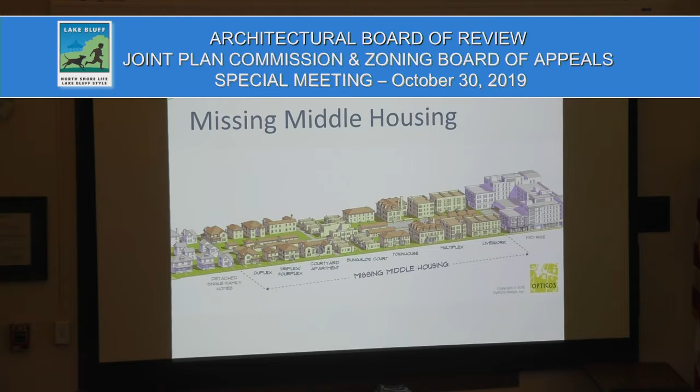They're actually called missing because typically they've been illegal to build this type of housing product. If you look at it, it's all that housing between mid-rise buildings and detached single-family homes. Since really post-war, that type of housing product has been outlawed by most zoning codes: the 2-flat, the 4-flat, bungalow courts, townhomes, not what you see built today.

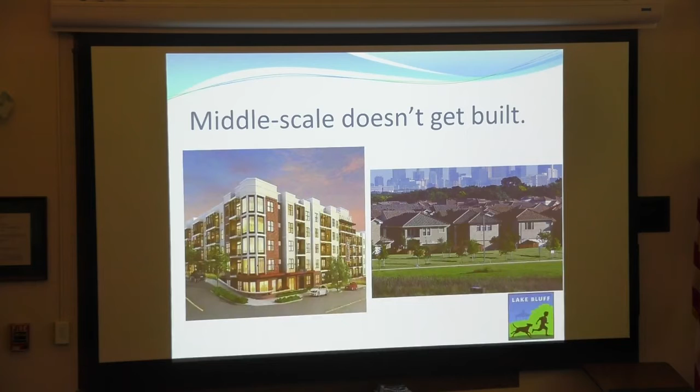I think of it like groceries - there's bulk economics, and then there's luxury groceries. It's the same with this type of building product. You see mass-produced single-family homes detached, and then the other kind is mid-rise, high-end luxury. That's what gets constructed today. Not a lot of anything in the middle, because they're complicated, complex infill deals, and also because they're generally outlawed by most zoning codes these days.

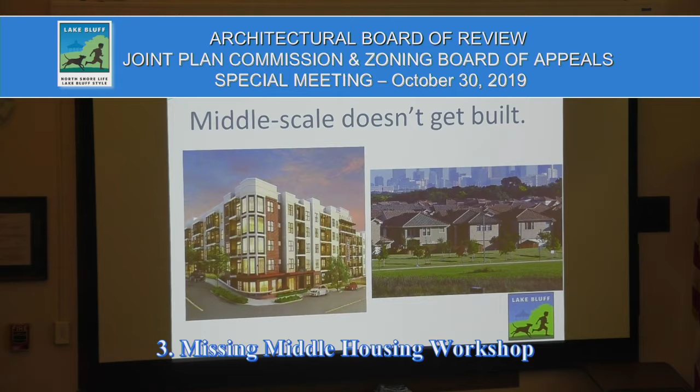I put this slide together - I was doing another missing middle presentation a couple weeks back for the American Planning Association Illinois Chapter's conference, and one of the persons on the panel presented a factoid that struck me as funny: by 2030, 83% of households in the United States would be without children. That struck me, so I tried to look it up and verify it. I had a hard time finding that exact fact - there was some information a few years old that was similar.

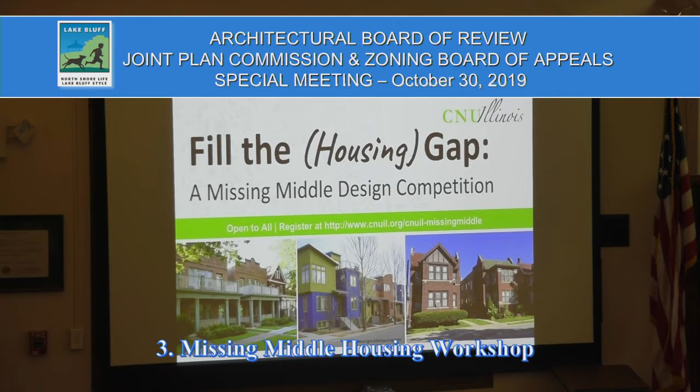A few years ago, Congress for New Urbanism Illinois had the idea to mirror a design competition first done in Michigan, bringing forward a similar competition to generate interest and awareness about missing middle design - that's how this all got started.

The goals put forth were to mirror Lake Bluff's goals: to improve the quality of life in our existing neighborhoods, respect and complement the site and community character of our area, and utilize affordable and creative design solutions that spur economic development and add local value.

The village doesn't have these specific goals outlined in any of our long-range land use plans per se, but these do match up with, I think, the goals the village had looking at this project.

The competition looked at 3 different properties. As I mentioned, they wanted real ideas for real sites. These were the 3 sites ultimately selected: one in Peoria, one in Chicago, and of course Lake Bluff. Very different areas, very different communities, wide-ranging populations and incomes.

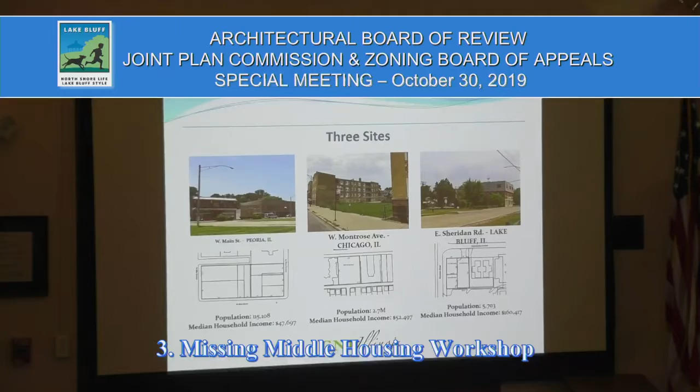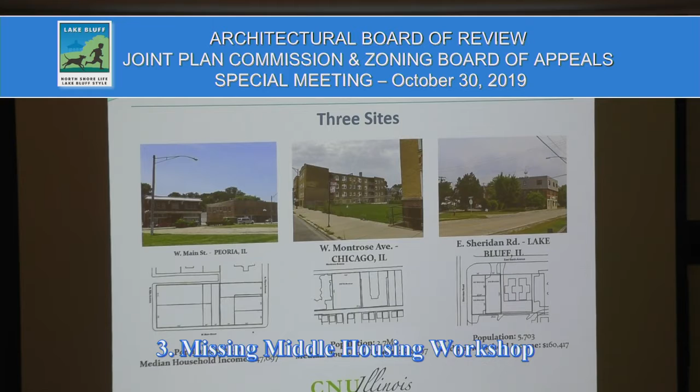Interestingly, I've learned since this competition that the architect who helped manage the project told me she's personally dealt with many more clients trying to solve missing middle issues in communities like Lake Bluff - more suburban communities that have more difficulty getting projects done, usually because of underlying land costs being so expensive.

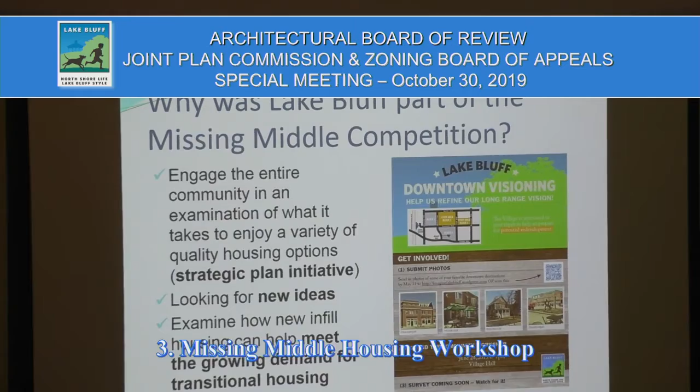So why did Lake Bluff do this competition? I think the leadership decided it was important for us to improve our tools for communicating the design intent for future redevelopment and evaluating proposals. The village did try to achieve a downtown visioning program to help identify the type of architecture we hoped to have in Lake Bluff, to put a finer point on that. We've tried that in the past, and we thought this would be another way to achieve something similar.

We've also looked at this as a way to ensure we can secure quality development that employs sound planning and design principles, to identify design elements that should be encouraged downtown, and promote themes and characteristics unique to Lake Bluff.

This ties back to the village's strategic planning initiative, examining what it takes to enjoy a variety of quality housing options in the community - again, looking for new ideas and how to meet the growing demand for transitional housing.

I say transitional housing in two senses. One, transitional in that when the village thinks about missing middle product type, it's transitioning from our central business district to the surrounding single-family detached district. Also transitional in that we have folks who frequently tell the village they're not desirous of staying in their large home on their large lot anymore, and would like another product to move into so they can still remain part of the community.

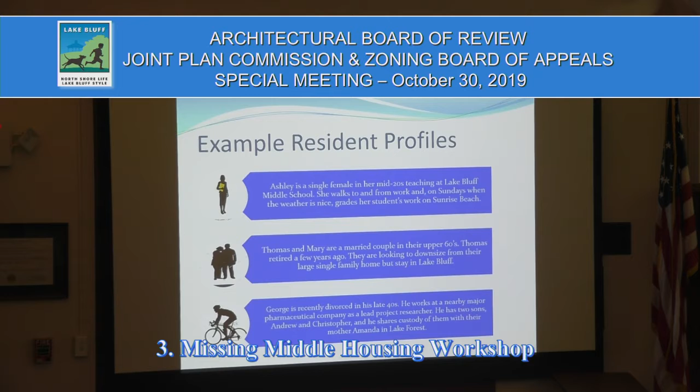So as part of this competition, we provided the Congress for New Urbanism, who we saw as potential residents of any development like this, missing middle. If you read these profiles, it's the single teacher looking to be close to work, the retired couple who wants to stay in town, probably travels to Florida for part of the year but maintains their memberships at a local country club and wants to stay with friends, and a recent divorcee. You probably know people like this in the community who've been looking for alternative housing products, and there's just not that many of them.

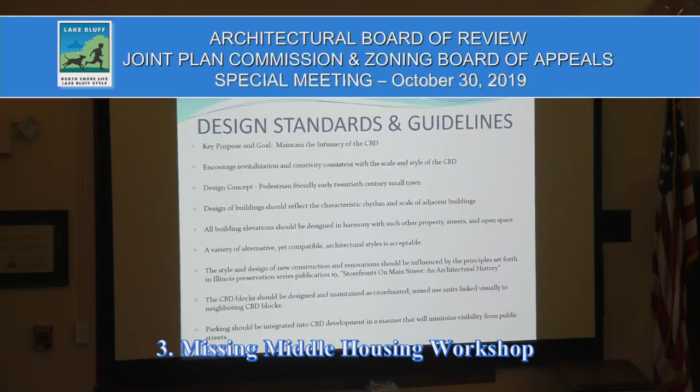This is some other information we gave the Congress for New Urbanism when they set up the competition. These are our design standards. I tried to distill these down to their essence, but this is what's in the village's zoning code. The main one that summarizes all of them is the very first one, which is to maintain the intimacy of the central business district. That's really what it's all about, and all these feed into that. I won't read all of them, but that's really what this is about. So the firms up here presenting their products had this information when they submitted their designs, and we'll hear more about their design process.

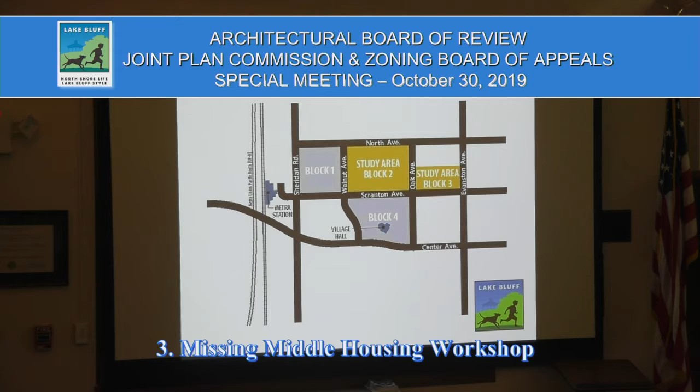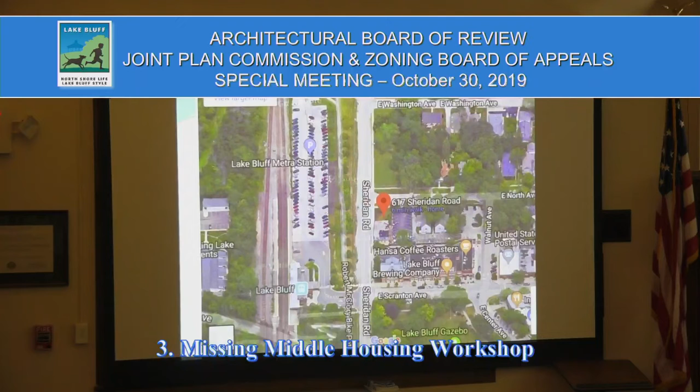The site in Lake Bluff is in the upper left-hand corner there, Block 1. This exhibit is from the design guidelines document we were trying to develop, and that Block 1 is where the site was for the competition. This is an aerial of it where that red pin is dropped. Most of you here from Lake Bluff know where that is, right across from the Metra station on the corner. It's an old gas station. The village actually owns the property in the upper northwest quadrant, and the balance of it is under single ownership, but it's that large parking lot and the 3-story building to the south.

So with us tonight are the two groups that submitted. It was a blind submittal in the competition, so we didn't know who they were. Interestingly, it turned out we had one of our own, Ed Deegan, who's on the Architectural Board of Review—his crew submitted, as did Mary and John from Morgante Wilson, a firm out of Evanston. They also submitted. Because it was a blind submission, it was hard for me to find out who they were—I actually found out on Monday, and they agreed in very short order to come and present what they submitted, so we're very grateful for that. I'll turn it over to these guys, the pros, and Ed, if you'd start off, that'd be great. Ed will go through and present their submittal, which is there on the left, then we'll give Mary and John a chance to do the same, and then we'll start our conversation.

Drew. I don't think you did anything wrong. Here we go.

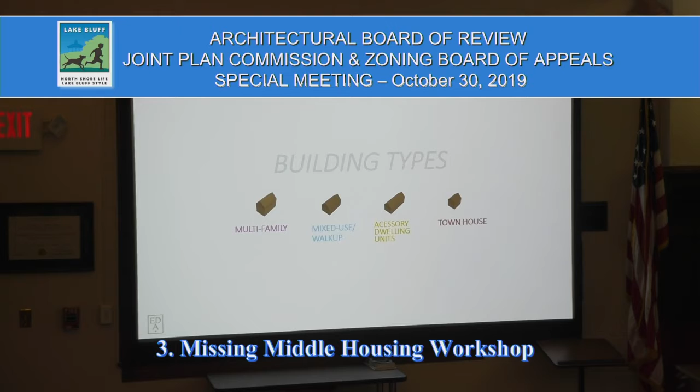And the fourth floor, which is really a half-story as we're calling it, which is housed within the roof, could have a one-bedroom and a studio. And this could be multiplied out in any number of ways. If you only have the requirements for a 2.5-story, you eliminate the third floor. Or if you need additional, you can add.

So again, we're working off a 30 by basically 32 module. And so when you look at the square footages allowed, everything is relatively tight, but when you link these buildings together, it allows you to meet potentially a more intensive program.

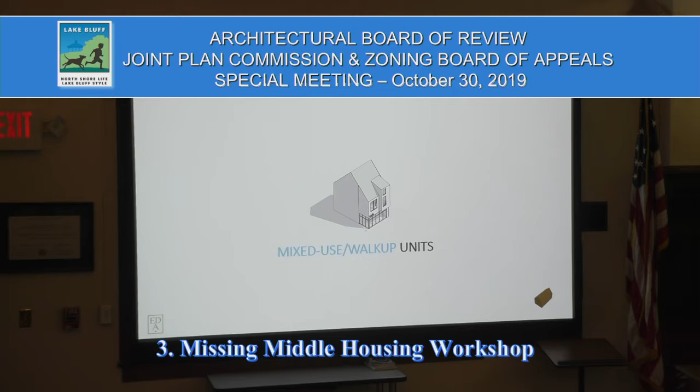So the mixed use and the walk-up unit, again, we pulled this program apart and we said, okay, this is also potentially a standalone unit. So the mixed use being the lower level is a commercial unit, and we can show you how we applied that to the Lake Bluff site specifically.

And then there's a staircase for a walk-up with a one-bedroom loft unit. This really was only intended or designed to be expanded horizontally. In other words, we're taking these mixed-use units, these modules, and adding them together horizontally with no intention to go vertical.

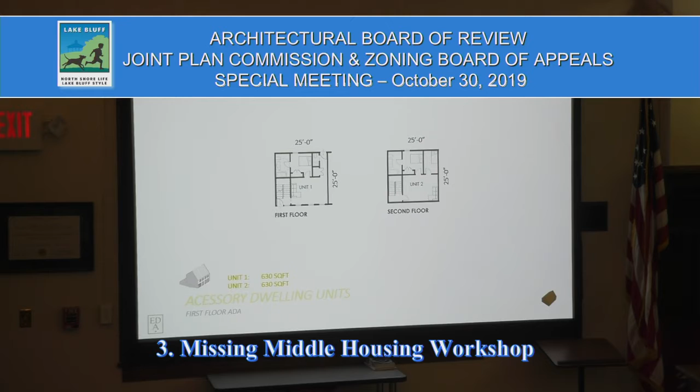The third piece of really the kit of parts is the accessory dwelling unit. This could be framed in many ways by what the missing middle has termed very small single family. So the first floor of this could be an ADA type unit for first floor living for seniors or what have you, where stairs is an issue, this could be a solution to that potential area of need.

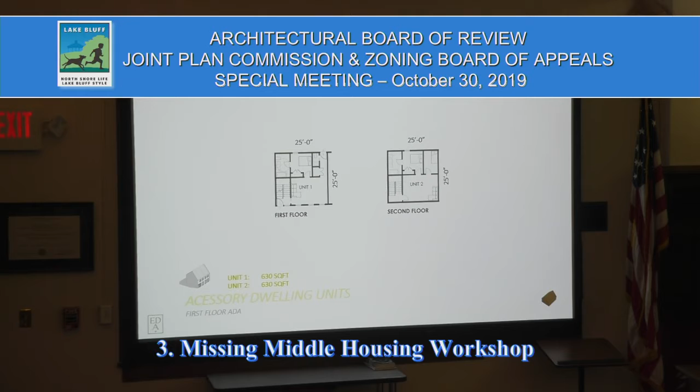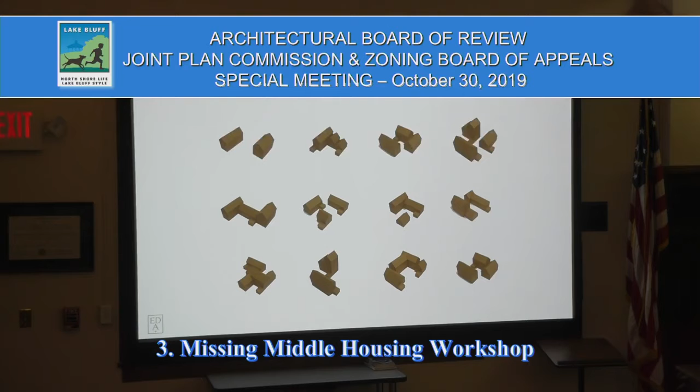And then again, the second floor, which would be a walk-up. So this could be single-owned, it could be partitioned, but the thought was that, again, this was a modular unit that would be added to not vertically, but horizontally. So the point here really is just to articulate the concept of any numerous ways that you can take these three typologies and move them around to solve the issues relatively quickly for any particular site, inclusive of the Lake Bluff site.

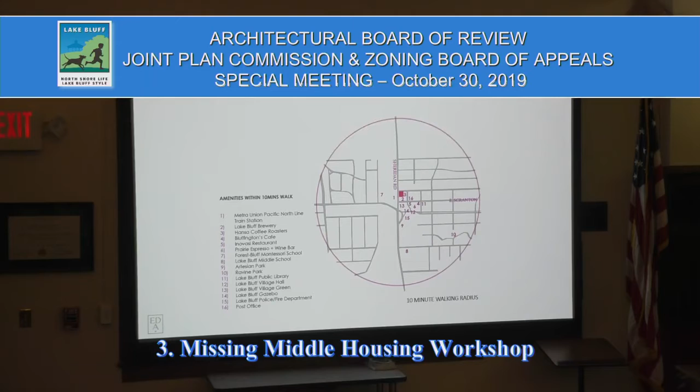Along East Scranton area, there's a commercial corridor providing a lot of restaurants, cafes, and the public library is close by. The village hall, fire and police department, and the post office are all close by, so basically this is a really ideal site. We did a quick study of the amenities around the area to assess what is required and what our program would need to provide and contribute to the community.

So this is your aerial view of the existing site. This big lot over here is where the proposed site would be.

Right now, along Sheridan Road, you have an existing mixed-use walk-up building type, and along North Avenue you have an existing multifamily condominium building type. Along East Scranton Avenue you have the commercial corridor, and the Metra station is right here. So we're trying to understand what's existing and really respect the building typologies in Lake Bluff.

We're trying to create a development that respects the transition areas between commercial and single-family units, and how we can create that nice intersection. So this is what we came up with.

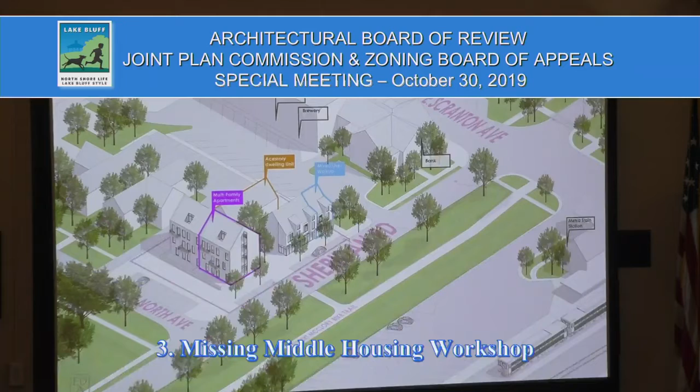We also created large green spaces, green open spaces, and courtyards just to really break up the site and the block, and create this transparency within the development.

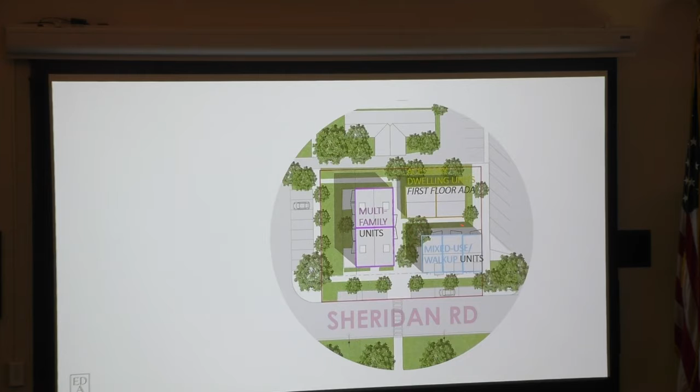So this is the site plan of what we're proposing using the kit of parts of the different modular units that we have. Again, we created a lot of courtyard and green spaces, looking at the existing Scranton alley and trying to replicate that, creating nice little pockets of public space between this huge development, and trying to create transparency between the building blocks.

So this is the existing street view along Sheridan Road. Again, you have the commercial property, commercial building type, walk-up, and you have the mixed multifamily condominium at the back.

And so this is what we envision. Again, we're respecting the village's ordinances, respecting that 50-foot boundary setback line between the two boundaries, pushing back the commercial unit to get a bit more breathable space between the streetscape and the building, creating courtyards, and proposing a pedestrian crosswalk to bring bike trail users and Metra commuters into this courtyard space we created to help break up that block.

Introducing tall windows for natural daylight, ventilation, and also promoting eyes on the street for a safer neighborhood. Also introducing balconies on these large multifamily buildings to help activate the building facade and provide social interactions between the neighbors and the streetscape.

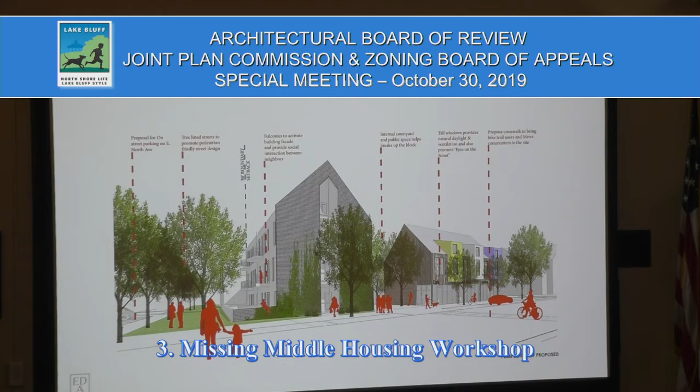And also continuing that tree-lined pedestrian-friendly street design, and introducing street parking on North Avenue and Sheridan Road to really promote the walkability concept.

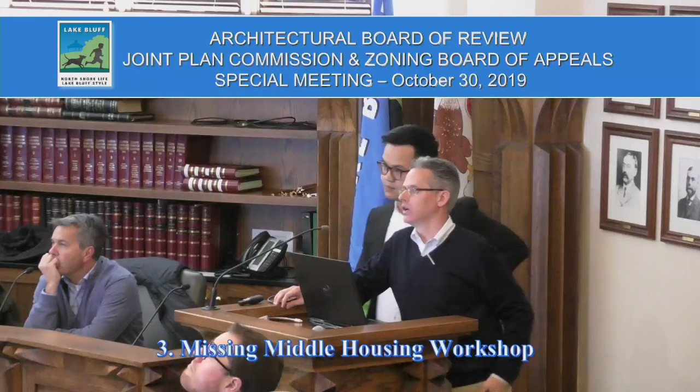So again, just a quick summary overview, and then we'll pass it off to the next. Conceptually, our concept deals with standardization of the kit of parts, which ultimately we hope would lower the cost and make this more attainable. We're addressing specific site conditions with scalable solutions.

In terms of how we're responding to Lake Bluff specifically, we feel like we're trying to create those Scranton Alley-like spaces between the structures, to engage with the landscape and make it a gentler approach with that particular site. Responding well to the multifamily to the east and the single family to the north, establishing a gentle sense of arrival at the intersection of the single family homes, multifamily, and the commercial activity and commuters.

We hope the aim is to really attract a demographic and life stage diversity and cross-pollinate residential life, commercial activity, and recreation. So that really is the summary of our scheme.

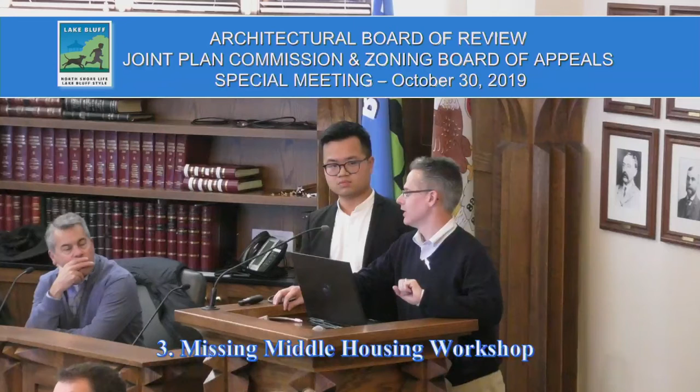The one comment I will make that I know will come up is parking. So as the premise of the missing middle, and with regard to new urbanism, the push is a pushback against the typical notion of what parking means and the general requirements of today. We get that we don't have the parking in our concept, but that's kind of the point—we're pushing back a little bit. So I'll leave it at that. Thank you.

Could you unplug yours really quick? Sure.

Mary, do you want to use mine, or you want me to pull around for you? Okay, no, I'll just come up here with it.

This was in the PDF. This won't work. This. It's not picking this up. Thank you.

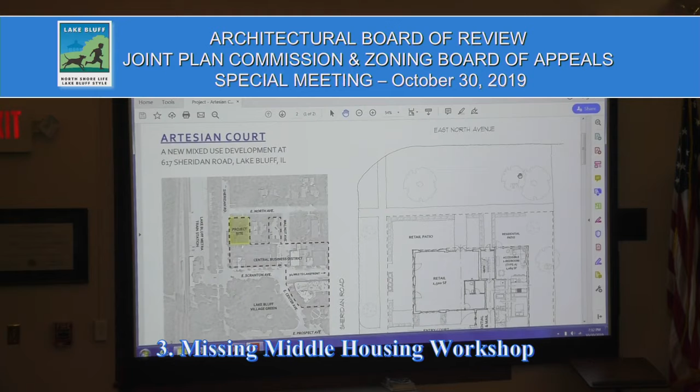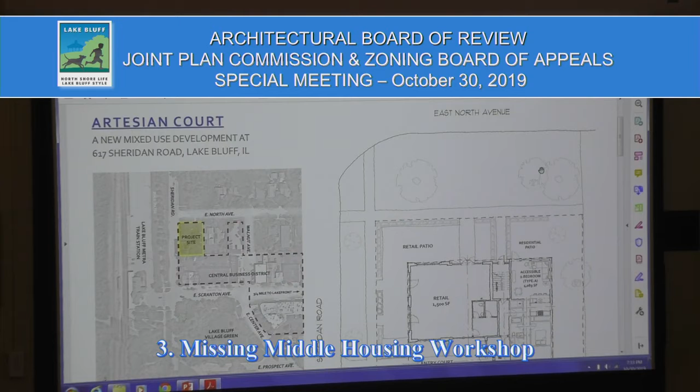We chose this project site option not only because it was in the North Shore, but because it was one of the more interesting ones due to its proximity to the central business district and being across from the Metra station. So we felt this is a natural place for densifying infill work.

As part of that, we were inspired by the courtyard type building, and Chicago has a very rich history of that building type. If you look at the site plan here, you can see that it fills in the city block by building out to the extents allowed by the zoning code you have in place here.

We wanted to keep the accessible unit mainly at the ground level facing North Avenue as well. The retail zone we thought would be nice on the corner there, so it kind of wraps the corner site.

Being a courtyard type building, we got 11 residential units in there plus the commercial space, so it did offer the opportunity to really maximize the density available at this site.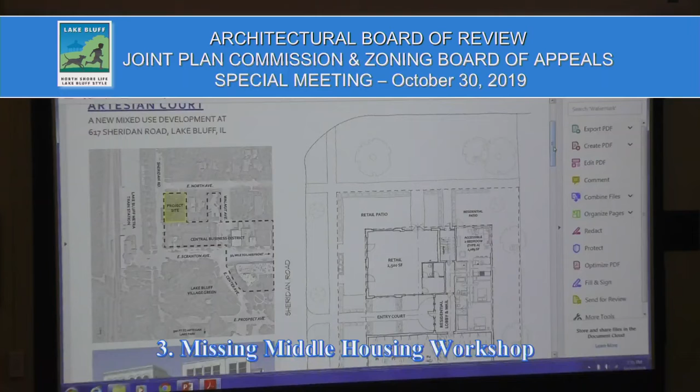The main entry to the residential units is through the court, and as mentioned, the accessible unit is on the first floor.

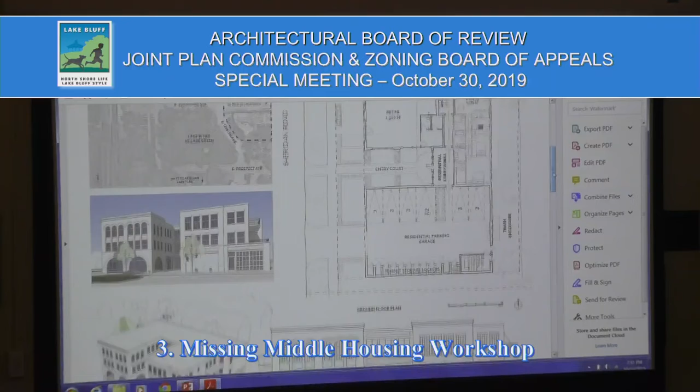As we come down, here you can see Sheridan Road running this way, with parking access through here. This is the entrance to that courtyard. This corner could have larger glass at the commercial space, and as you come around to north, you have access to the accessible unit off the first floor.

This is what you see looking as you drive past on Sheridan Road. You'll have the garage entrance here and then commercial space at that corner.

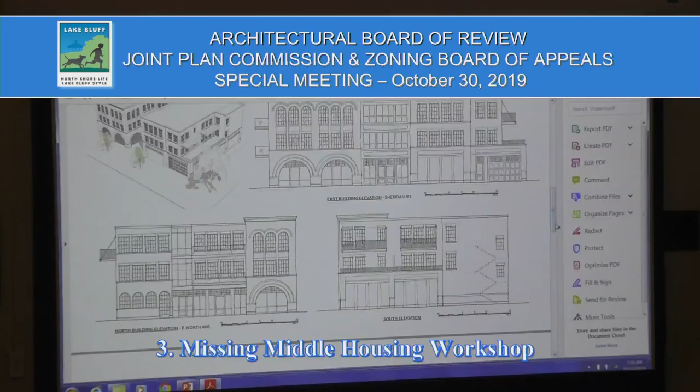From North Avenue, again you have the commercial at the corner, and this is your access to that first floor unit. This is looking at the corner towards North Avenue and Sheridan, right at that corner.

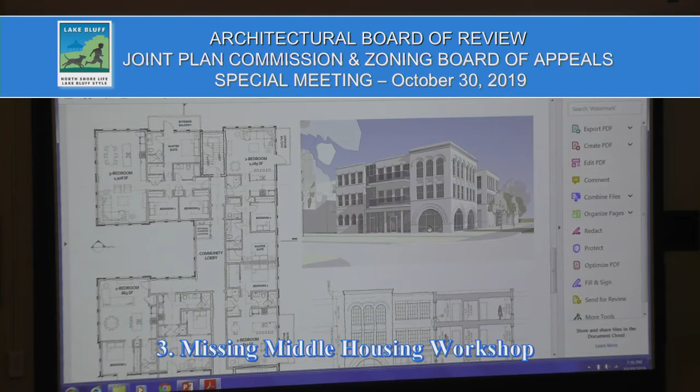We got 2 three-bedroom units, and that's the premier unit, stacked above the commercial space. We felt it was larger than any of the units shown in the previous design, and there's certainly lots of flexibility in a building like this to mix and match different sizes of units.

So we've got the 2 three-bedroom units here and here, stacked. Over on this side, those 3 were all 2-bedroom units. On the far side of this perspective, there's a single bedroom at the corner and a studio behind that, and at the very back of the building, there's another 1-bedroom.

The courtyard is also great because it offers a lot of light into the building from all sides. And every unit has some sort of balcony space, which I think is very desirable in today's market.

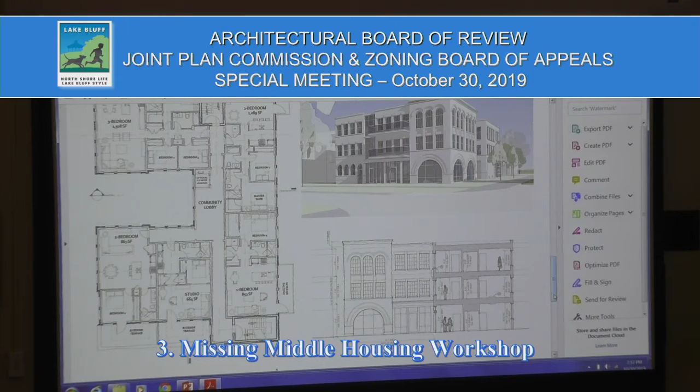Well, we also felt that having the various unit sizes within this density would create affordability. We also felt that creating the courtyard and then the green space on the east side and north side sort of softened the building and its impact on the east neighbors.

And then we felt that having the parking on the south end, it was neighboring against the commercial parking that is to the south. And then have the courtyard facing the train station.

I think some of the parti, or the design of the elevation, was to be sympathetic with the surrounding commercial and the train station materials and aesthetic. So that kind of concludes our presentation, so thank you for having me.

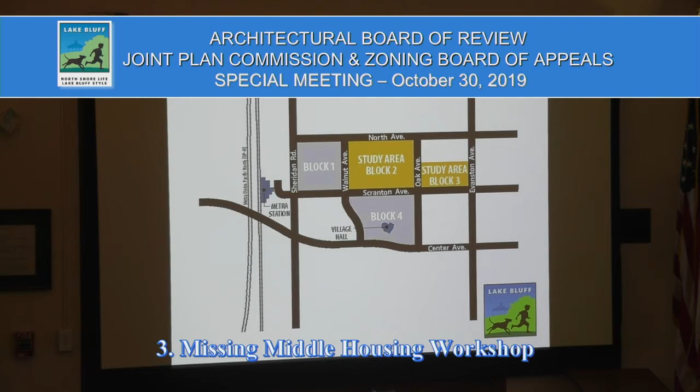What I'd like to do is jump to some questions, and I'll let our panels maybe start off, but they are not here to hog the microphone necessarily. So we have lots of skilled architects in the audience, and if there's other questions or thoughts that people can have, that'd be great. And even if, Ed, if you have questions of Mary and vice versa, I hope you guys could ask them.

But let's start with Rob, perhaps, and maybe since Rob, you were the developer of Block 1, maybe you want to talk us through how you approach design from a process for projects like this.

Well, Block 1 now has been 10 years since it's been there, so that process was like 12 years ago. But I can tell you that I look at myself as more of a contextualist type individual, and the inspiration for that particular building was the John Griffith building where Bluffington's is located.

That was really sort of the reference that we drew upon in generating that particular building. And I think as far as this site goes, what makes it different from a context standpoint is, unlike Block 1, where the project I was associated with, all we had was really just a downtown and the village green, which we saw as an opportunity to bring closure to the village green and create a real nice space within the downtown.

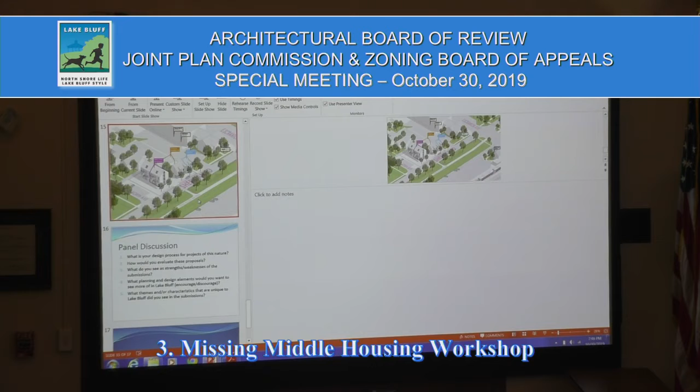Ed, my recollection for your product, you said you had a variety of skins you could use. I think for what we were proposing for Lake Bluff, we had masonry shown on it. Ours has a bit more of a modern or contemporary approach, but it can be tailored. We didn't really get into the level of detail because we were trying to articulate a larger concept that could be applicable to numerous sites. But the goal for us would be a combination of masonry and brick to match the Block 1 buildings, in addition to playing off the train station, and then wood or clapboard siding that would be horizontal, to try to break up the modulation in the bays.

Yeah, I'd say when Mary and I sat down when we were first reviewing it, our building had more of a contemporary bent to it, and we were looking at wood, stucco, and metal materials for it. But as we were heading toward the latter part of the design, we were influenced by the train station and the neighboring commercial area, and that's when we turned toward more classical details and the brick being a softer, more contextual material.

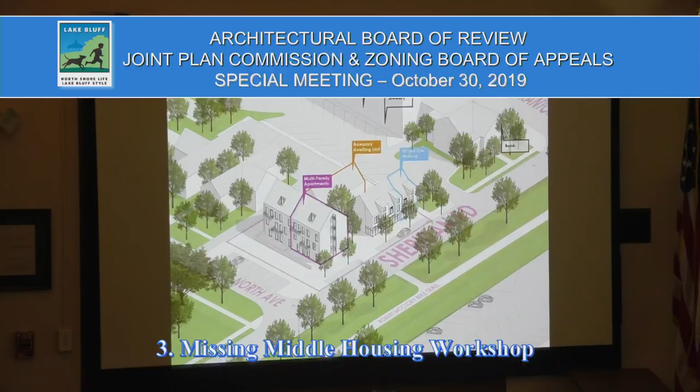So if you look at that, basically on your left of North Avenue is where the multi-family apartments are, and on top is Block 1, which is your commercial — that's the bank, the brewery, the food mart. So basically we're just trying to understand how that entire kit of parts really sits in the site.

And again, for material textures, our main idea isn't really to dwell into the specific materiality of the building, but just to convey that it's very flexible. You can increase the building height, increase the building size, and really change the building material according to its context. Here in Lake Bluff, you'd probably use masonry or clapboard siding, but downtown in Chicago, you could use more contemporary materials like metal panels, stucco, or a more contemporary look. So it's really just conveying the flexibility of this concept.

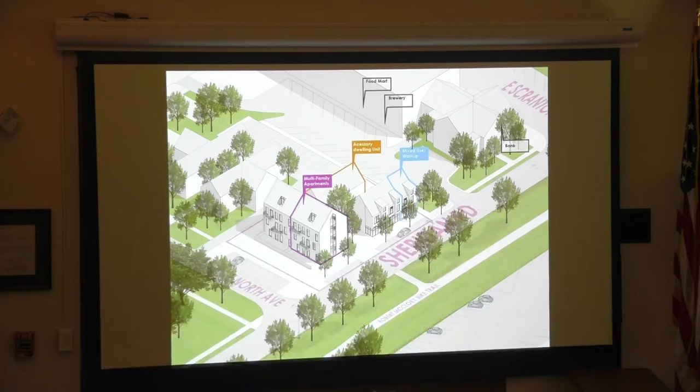So what really differentiates the projects is really the design cost. What we're saying is that we are designing the bones for you. So you have this selection of different modules that you can take with you and cut your design cost by, let's say, 20 to 30%. And then you put that into your specific site and look at the site conditions, and dive into the materiality where the site positions of different building types are placed. So that's the main concept behind Assembly Required.

The overall building height of our building was around 35 feet, which I believe was the max building height allowed for that block. We didn't measure any of the surrounding buildings, but I believe it would fit in with the bank around the corner, and also the building currently at the site, which I think is three stories. So I don't think it will feel too tall in that area. I think it fits in pretty nicely at that height.

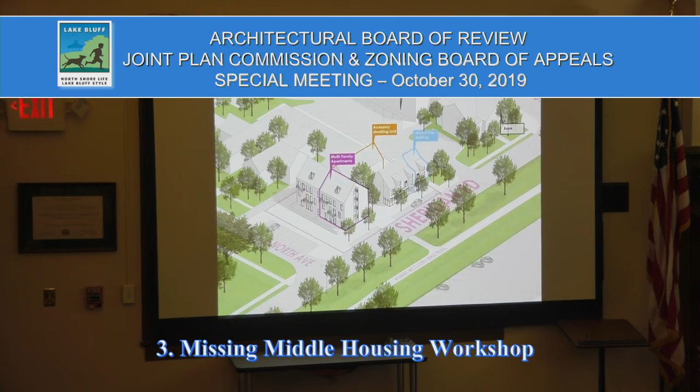I can remember talking, though I don't really remember my logic on that discussion. I do remember having a discussion. But to me, it was not that much taller than Larry Booth's series of buildings next door, at least I don't think it is. But it's set back a bit. I really didn't have a problem with it, and it is a bookend, because if I remember right, when Rob did Block 1, the required building height was 34 feet, and we ended up going to 35.

I think the backside of the building is just sort of the backside of the building, except for the bank. And because of the bank, the shape it is on the backside, it's a lower scale, or appears to be a lower scale. So I think what Ed and his group have done is they kind of worked their way back up. But it's still, because of the sloping roofs, the only thing that's really tall is the peak of the roof.

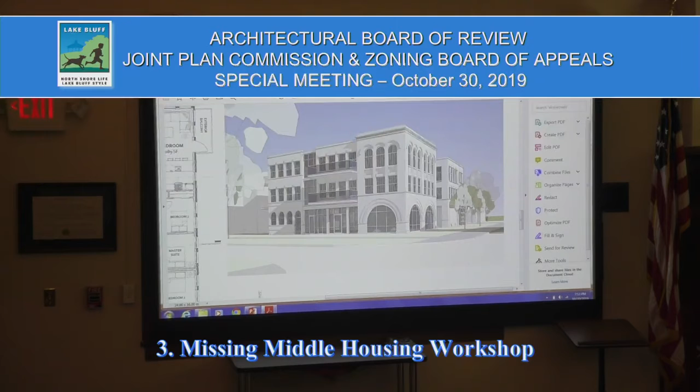As long as I've got the microphone in my hand, one of the things I think needs to be addressed in any of these kinds of projects - there's a couple of things. We always talk about mixed use and retail, but we don't really know what retail is anymore. So we make a lot of big space and grand ideas about what retail is, but we don't know what goes in there, because there's already a lot of empty retail space.

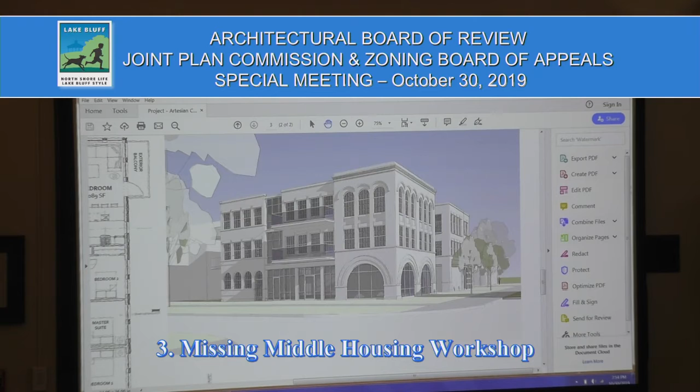And I had suggested to Ed, after he had done that, I said, you've got all your retail on the front on Sheridan Road. For what reason? Because you've got some really nice little courtyards, and if you take some of those and turn them around, they become internal retail spaces geared towards the people that live there, and somehow you could connect it more into the town itself, which isn't available pedestrian-wise other than crossing Bob's parking lot and things.

Just to be clear, Bob, you're picking these up and turning them around? Well, not necessarily all of them. You start to modulate the front too, because you don't want to ignore everything off of Sheridan Road. But again, it's what is retail?

Right now, retail is take-care-of-yourself shops. And so, service—the little stores have kind of gone away.

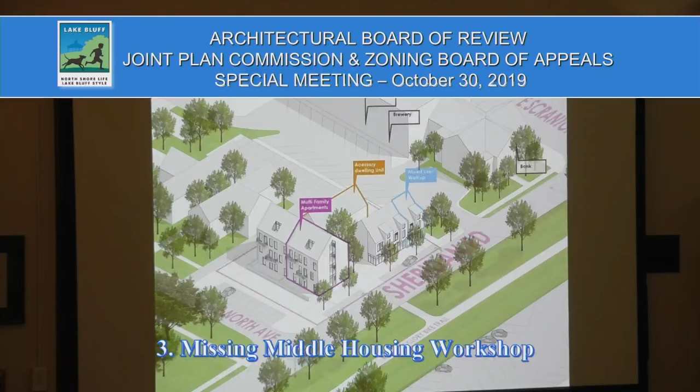So the other thing is, based on what you said and my own personal experience now of getting to be old, this does not necessarily address folks like myself who really don't want to go up the stairs anymore. And it wasn't necessarily intended to. But I think in the grand scheme of things, we need to start thinking more about that. Based on your demographic thing, there are more people like me around now.

So that's something I think is an issue. I see these townhouses going up all over the place, and you've got to go up 10 steps to get to the first floor. It's like, that makes no sense, I'm sorry, I can't buy that.

The last thing you want is one of these wooden ramps going up to your place. So the idea of not necessarily ADA accessible—that's important too—but just for people that are aging and can't manage stairs. My wife has two artificial knees, two artificial hips, and back surgery. It's hard to go up and down stairs anymore, and I've got a fairly large house with lots of stairs. So anyway, that's enough about that.

As far as Morgan Wilson's, when I first saw that, I thought, well, that doesn't have anything to do with Lake Bluff. And what bothered me was the giant arches. I don't really want to talk about architectural stuff, but the same comment about the retail on that very prominent corner—I always wonder what it is, besides for-rent signs. And in parts, it's got almost an industrial character, which I don't mind.

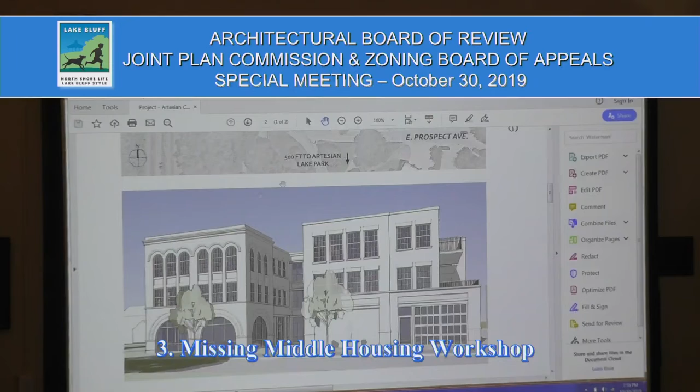Let's go back—that was before your time. Yeah. Kathy, what was their original? Was that what it was? Was it a Nash dealership on the corner? Where? Oh, that's a little—yeah. No, that was further up, where our sales was. Okay, that was an Albertson's 1920s gas station.

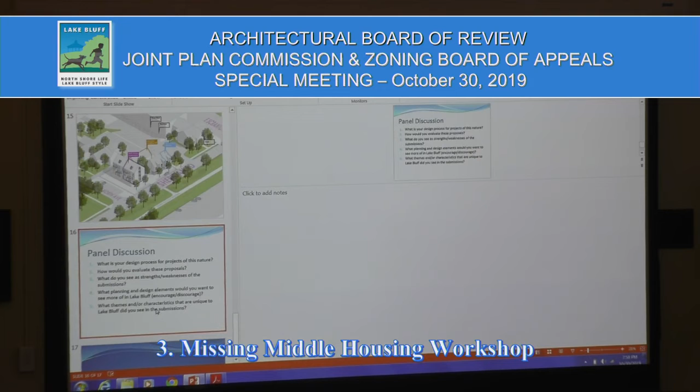So, our esteemed panelists, do you have any thoughts on these proposals that haven't already been shared? Feel free to dance around these questions if you like, or jump around.

Honestly, I think they both have a lot of viability. They're both very different—one picking up on more residential forms with the gable form, the other being the Chicago courtyard typology, which is a nice historic reference. That's one thing that's unique about Chicago, those buildings. The modular approach is really thinking outside the box, which is very unconventional in many ways from what one would typically think. So I think that's kind of refreshing.

But as far as some of these other questions, I guess, one thing I would like to see—bear with me—is it too much for me to be looking at these two schemes and still thinking about the other parcels in town, and how this process might help inform how those properties evolve over time, too? That being the PNC property, and I think it's Block 3—no, it's Block 2, the bigger one in the middle.

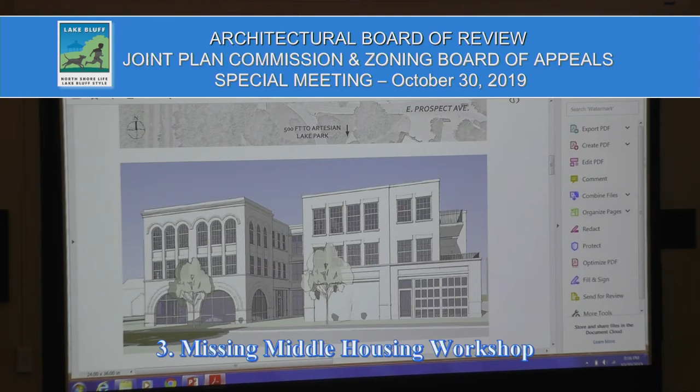And the other kind, would those be possible for elevator, or? Yeah, there's definitely a vertical circulation space in the mixed use, mixed multifamily residential units. So that's definitely something that was considered for. Elevators obviously are really expensive for this kind of scale, so there is obviously thought to that, and that idea of vertical circulation could become that space. Great, okay, thanks.

Anybody have any? Scott, anything?

Yeah, I would also echo some of Rob's thoughts, and I think the challenge of these projects is really working to minimize the massing and the scale of these projects, juxtaposed against the economics of the deal, of the project.

And I think there are ways to do that. You know, I see 3-story walls and 4-story walls, and as Rob said, maybe there's a way to soften the edges. I think most of downtown Lake Bluff actually has a 2-story cornice line on most of the buildings, and then the 3rd floor is kind of tucked under a roof structure with dormers, and that really does help to bring down the scale to more of a pedestrian-friendly type feel.

But I know it's hard when you're trying to achieve a certain density and make the economics work, so that's the challenge. Real quickly, what Scott was saying, that's what we did with the 3rd floor elevations on Block 1.